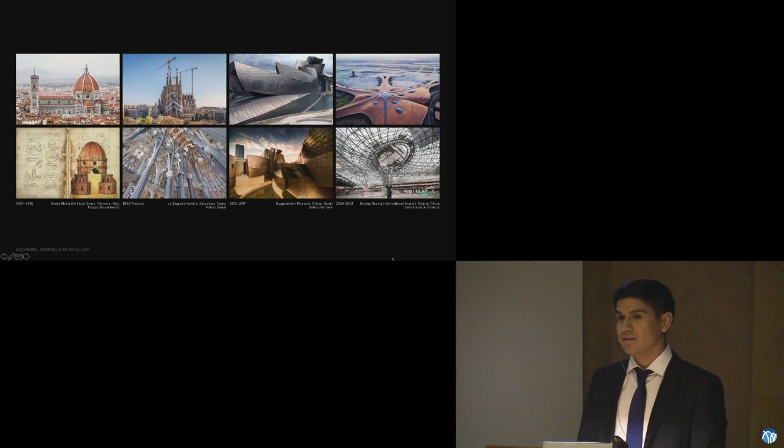And so moving forward, we think about La Sagrada Familia, where some of the physical models being used to demonstrate that this could work were actually the characterization of the structure, the hanging chain models that Antoni Gaudi put together. And what you see there is a shift from representation in materials to actually letting the materials demonstrate what the architectural form and structure would be. And more recently, if we think about the Guggenheim in Bilbao, we see that, of course, there's a need to express some artistic manifestation, but there's also a new use of digital technologies to be able to achieve this kind of geometry. And it's Gehry who pioneered the use of CATIA software, used in the aerospace industry well before it was used in the building industry.

And today, in projects like the airport in Beijing by Zaha Hadid, we see that there's a really big advance in how technology is being used to represent ideas of structural qualities and form, but also to discretize both the enclosure and the structure as one. So what we see here is an evolution of digital technologies and modes of representation to affect architectural methodology.

At SOM, we work on all kinds of projects, everything from small scale, including additive manufacturing projects, to large scale skyscrapers. And what you see here is every building looks different, and that's because every building has to function differently and has to respond to a very different environment. And so we calibrate our designs and inform them by looking at the environment, looking at urban systems, looking at material qualities, and also looking at the client's needs.

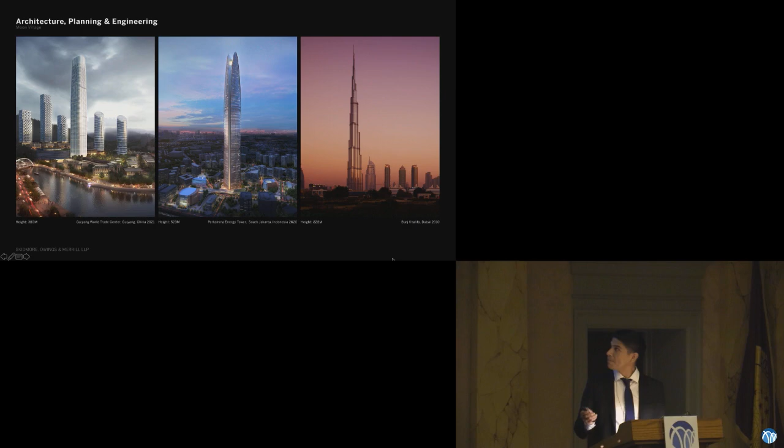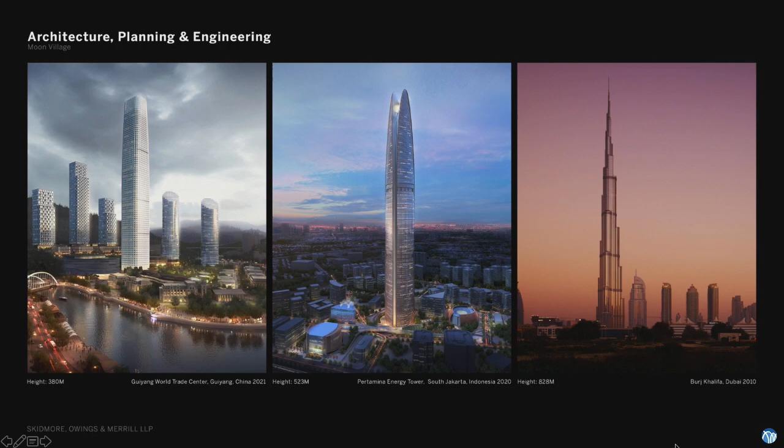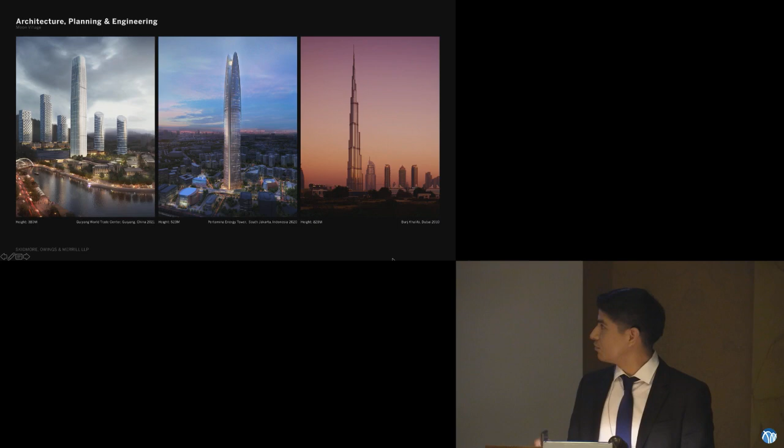But this small depiction of the projects you see here is only a small fraction of the work that SOM has done. And so we go from tall structures. Some of these buildings go up as high as 828 meters, like the Burj Khalifa. And some of these buildings have big ideas on how to use energy, like the Pertamina Tower. A project that I was very fortunate to work on, the Guiyang World Trade Center. This one takes urban integration to the next level, where we look at a tower not just in isolation, but we also look at the tower and how it integrates into a much larger urban system.

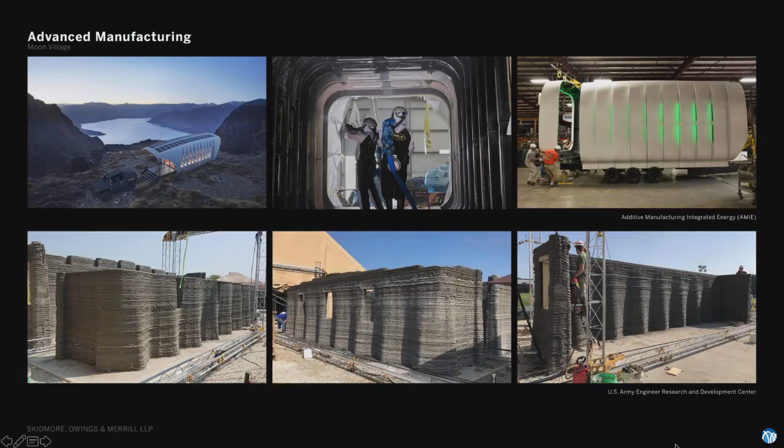And then we also have much smaller projects taking place at SOM. These are research projects where we're working in collaboration with institutions like the Department of Energy or the US Army Corps to look at new ways of manufacturing. In the top project, the AMIE project, they're using polymers to 3D print entire structures. Then on the bottom, we're using gantry systems together with additive manufacturing to look at how we can build using cement.

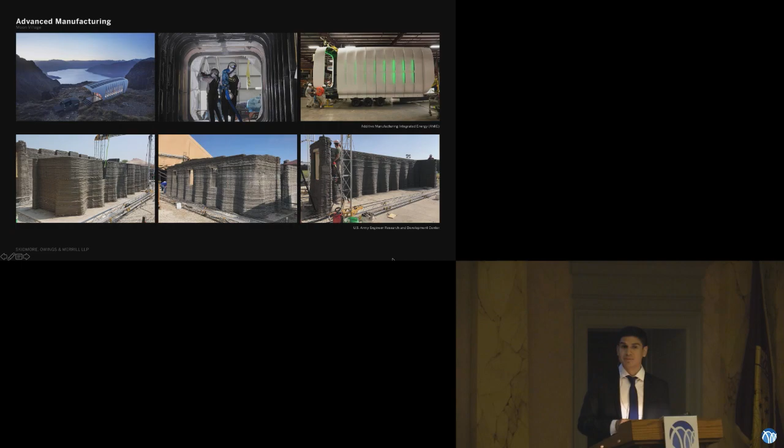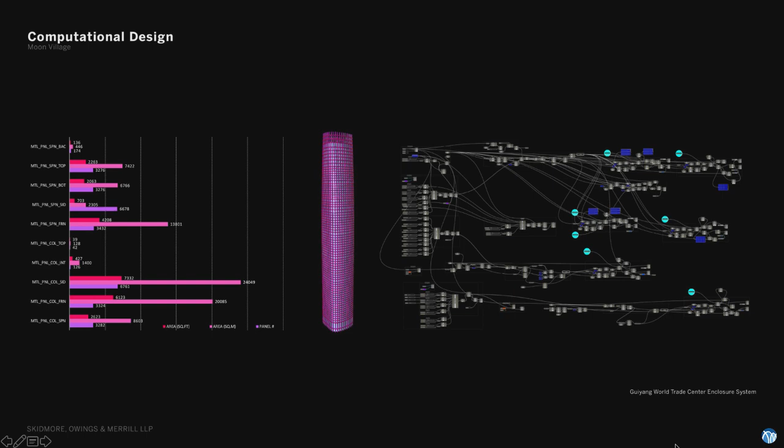And a lot of the things that we do for both small and large have to deal directly with digital technologies. What you see here is a representation of a digital model on the left, the quantitative data right next to it, and then also the scripting techniques that we use to build these very densely populated models. And all this allows us to think about architecture as form, but also architecture as engineering.

So now I want to move on to talking about this research with the moon base. Like I said before, it's truly an interdisciplinary project. And what I want to instill is that these kinds of ideas can only take place through direct collaboration. But because ESA is really far from us, obviously, we do have a methodology for how we do the research. And so it's treated more like a project and less like a research project. And so the goal is to take all of the knowledge and the expertise that we have built to construct cities around the world and to pass that on from an architectural perspective towards building outside of Earth.

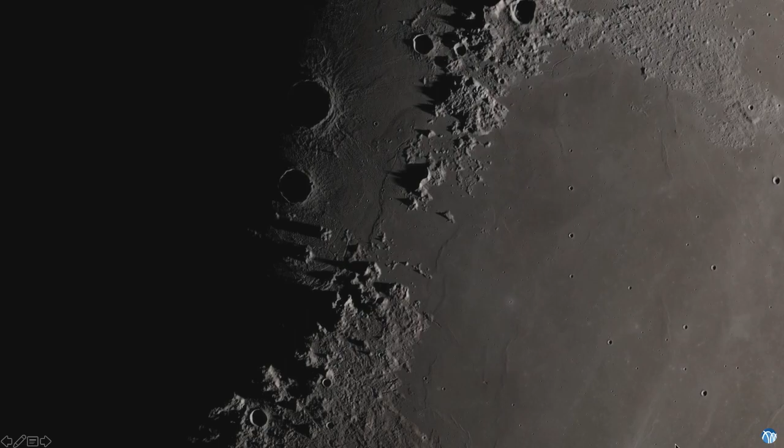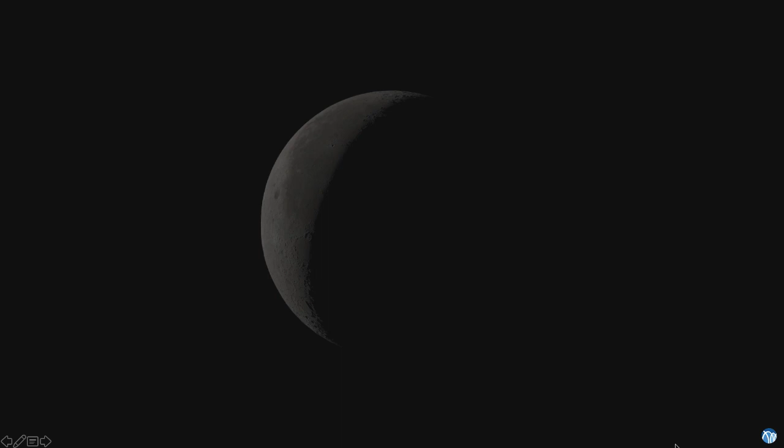We choose to go to the moon in this decade and do the other things, not because they are easy, but because they are hard. Because that goal will serve to organize and measure the best of our energies and skills. Because that challenge is one that we're willing to accept, one we are unwilling to postpone. That's one small step for man, one giant leap for mankind. Three,

So to start off, I want to first demonstrate the vision. The architecture and vision of a long-term human settlement on the moon requires a holistic approach to planning, emplacing, constructing, and expanding an evolving lunar ecosystem. An open architecture will depend on the efforts supported by multiple nations and partners, combining their expertise and capabilities toward the common goal of expanding human presence in space for both exploration and development. The vision begins with a singular architecture, which is designed to enable surface exploration and resource utilization operations, leading to a diversity of activities that will evolve and transform an architectural paradigm for living in the lunar environment. And what you see here is that vision.

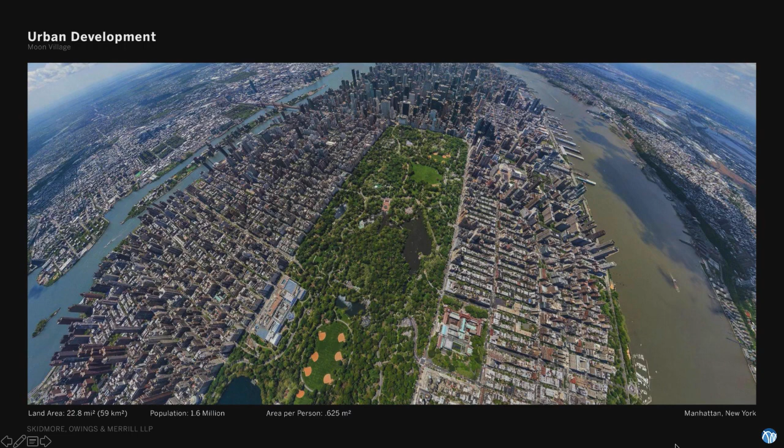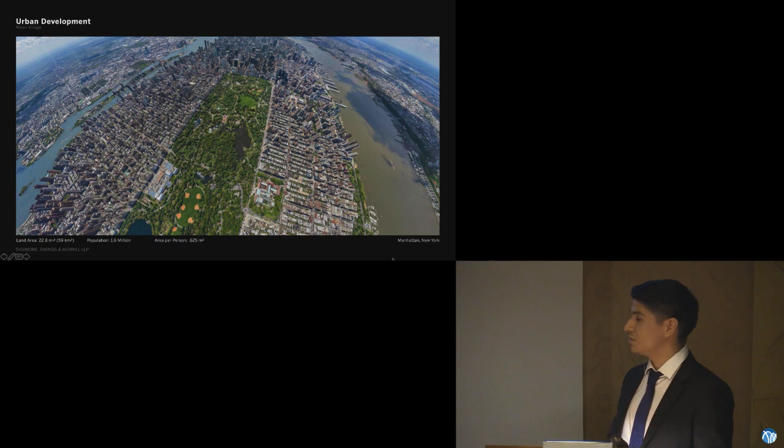But also, we have to think about urban development at large scales, because once we see the promise of how to exploit or how to develop the lunar surface and its environment, we're going to see that there's going to be a lot of interest and a lot of expansion. And so planning strategically, thinking about the far future, will have an impact on that. And we can see that places like New York, Manhattan, where you have huge, very dense populations, but also because of the geographic limitations, the only way to build is to build up.

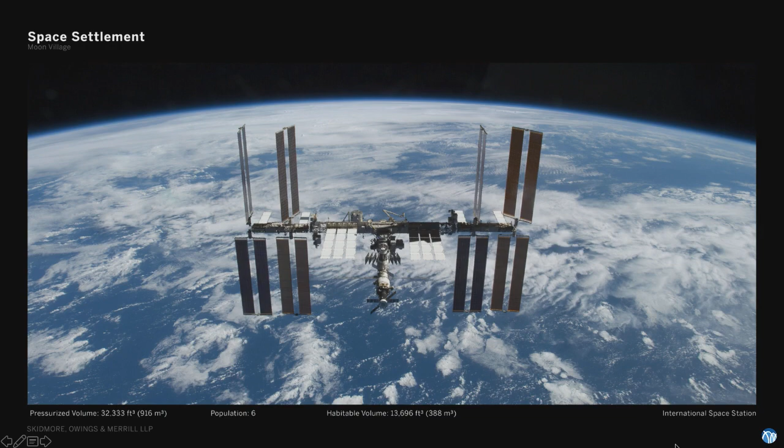And then thinking about space settlement, we already have a permanent space settlement, which is the ISS, which has been continuously operated since 2000. So we already understand what it means to live in space. With a small population, of course, never bigger than 6, but also a very small habitable area or volume in this scenario, because now we're thinking about volume and less about floor area. And so if you think about the difference between pressurized versus habitable, this is a big distinct factor where you want to really design around habitable volume, since that's the only thing that you're going to be using. In this case, we have 388 cubic meters of volume.

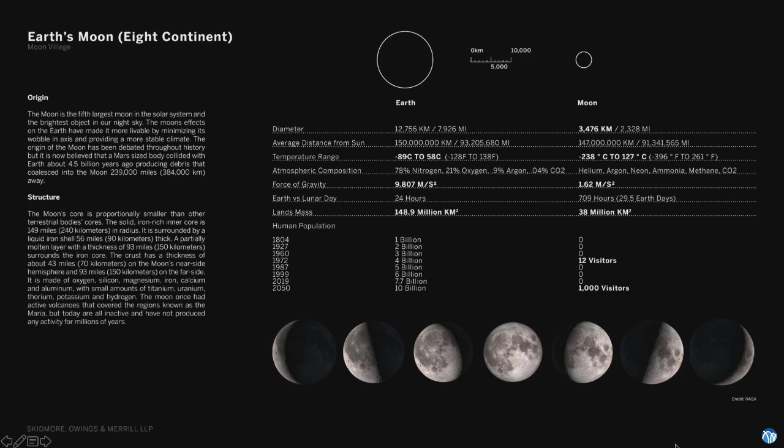And now, to think about the moon as a site, we see that there's a lot to contend with. The moon comes with extreme environments, but it also has a lot of opportunity. It's considered the 8th continent, roughly the size of Africa. And because of that, there's a lot of interest, but also because of its available resources. And what we've done is we've started to study the moon together with our partners at ESA, and to look at what are the key necessary criteria for evaluating a site for optimal development.

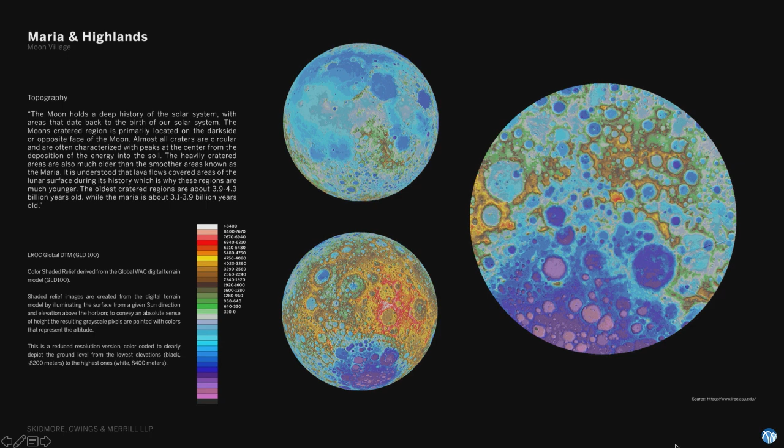And one of those things is the terrain. So we have 2 distinct types of terrain. We have the Maria, then we have the highlands. And we know that in the South and the North Pole, we have primarily highlands. But the highlands also offer an opportunity to capture sunlight because of the altitude. And because of the obliquity of the moon, which is something like 1.5 degrees, there's areas where you have near continuous sunlight, which allows us to think about energy collection.

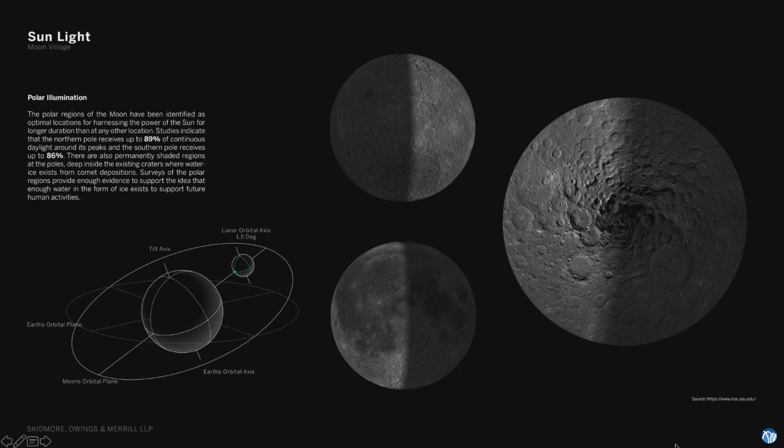And that's something that we've been targeting very closely because in some areas you have as much as 86% of near continuous daylight. And that means that by lifting your structures just a little bit off the terrain, you can actually take advantage of that energy. But also, you can take advantage of direct-to-Earth communications so that you can teleoperate equipment and robotics on the moon.

And the most important one, which we see as a medium for energy, is water, but also as a medium for life support, for oxygen, to have breathable air. And we know that there's cold traps on the South Pole, and this hasn't been completely accurately quantified, but we know that there's a lot of it. And some of the mapping done from previous missions has demonstrated that. And so we've studied that together with ESA to help identify small water ice deposits, not large ones, because those would be really far to reach and hard to reach, but smaller water ice deposits.

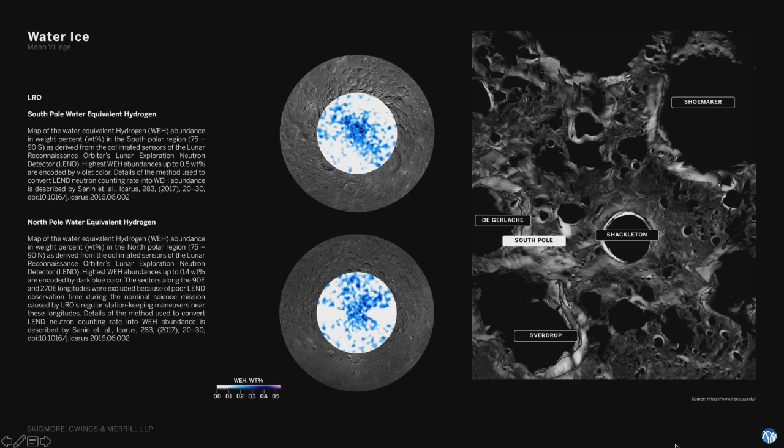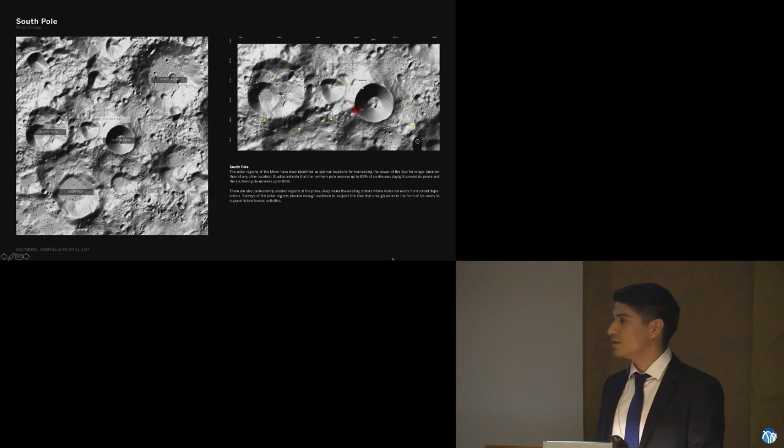And so we've targeted an area around Shackleton Crater on the west side, looking at the location and character with small water ice deposits, which you see here in red. And what's unique about this area is that it also meets the highest points on the moon, which again increase the amount of energy that you can collect, but also supply us with direct Earth line of sight.

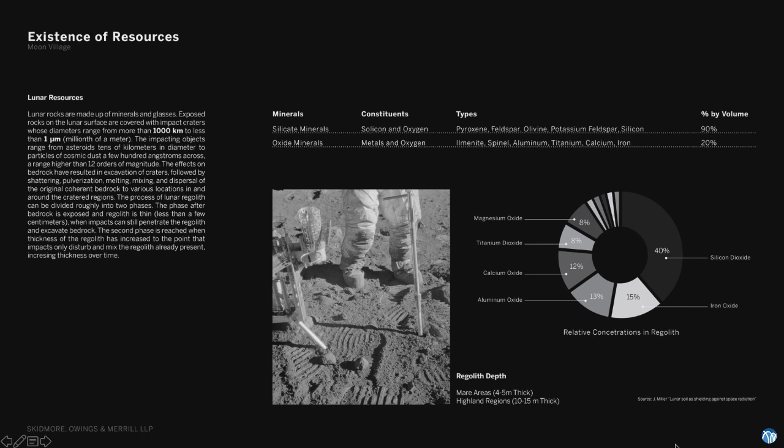And lastly, of course, we have lunar resources, which are inside the regolith. And so if you think about the opportunities that the regolith provide, being primarily silicate and oxide minerals, we can take the regolith, we can take the metals, we can produce tension structures, we can produce materials for life support, we can produce composite structures to help shield from radiation, but also we can learn how to operate and how to build on the moon.

And so in some areas, in the mare areas, research has indicated that the thickness of the regolith is 4 to 5 meters thick, where in the highland regions, it can reach as much as 10 to 15 meters thick. And so it's something that we have to study because if you're going to build a solid foundation, you're not going to hit bedrock. You're going to have to find ways to sinter the regolith to build a solid foundation.

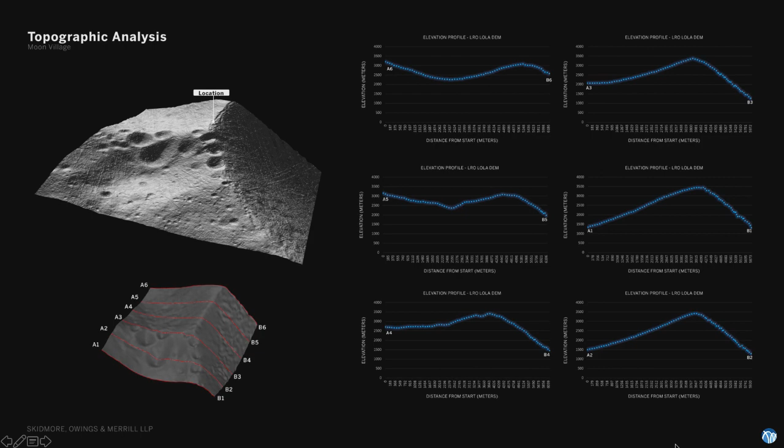And the way that we've done this is by taking information from the LRO mission and creating topographic models, three-dimensional models that we then slice up and we start to evaluate for levelness. So the less change in topography, the better, because we know that we have certain landing capabilities that can land with a certain precision. And if you can identify an area on that part of the moon where you can land equipment, but you can also ensure that there's enough mobility, then you have a good site. And so we've done this for various different sites, and that's how we came up with that site.

So the next thing is also fuel, something that we understand is really a big constraint, because in order to get out of the deep gravity well of the Earth, you have to reach a certain delta V, which is 6.1 kilometers per second. And so that constitutes a lot of the vehicle mass that you have to consider. And we understand that this is not something that we're going to completely work through, since we're not in the business of transportation systems, but it's something that we build into our design thinking so that we understand the mass penalty that our structures have to incorporate.

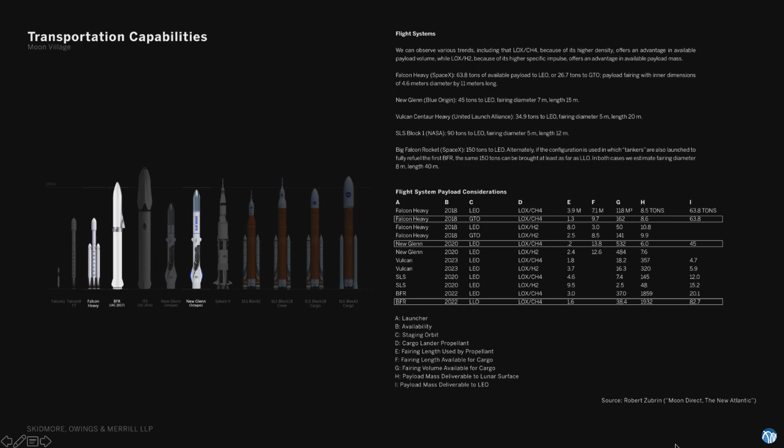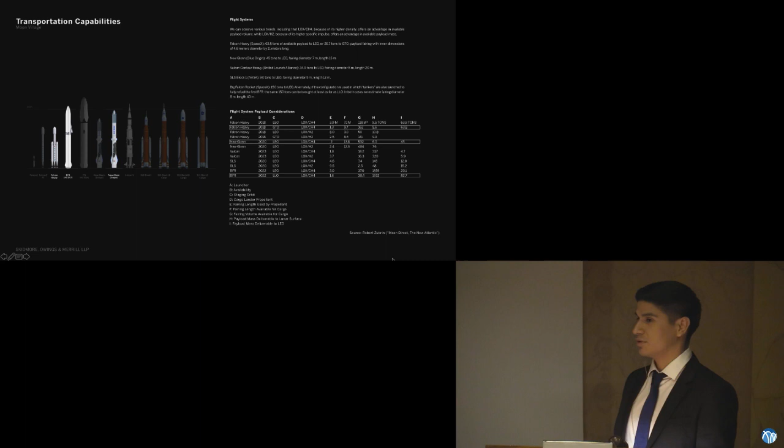And some of the vehicles that we've been looking at more recently include the Falcon Heavy, which is what we see as a low-volume, high-mass vehicle. And then we also looked at the New Glenn, which is more of a high-volume, low-mass vehicle. And then hopefully, when the BFR comes online, we can start to think about larger architectural types. And if you look at the numbers, for example, the Falcon Heavy can take 63 tons to LEO, where the New Glenn can take 45 tons. And of course, the BFR could take a lot more. And what we've done is we've tried to optimize our mass in our structures and our designs to meet the payloads for any one of these vehicles.

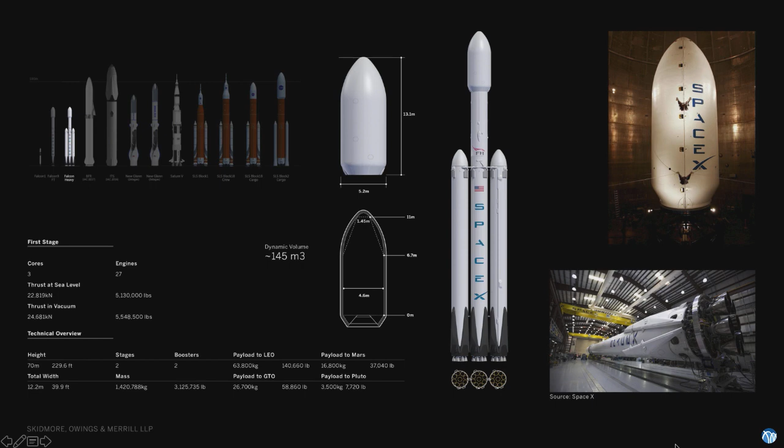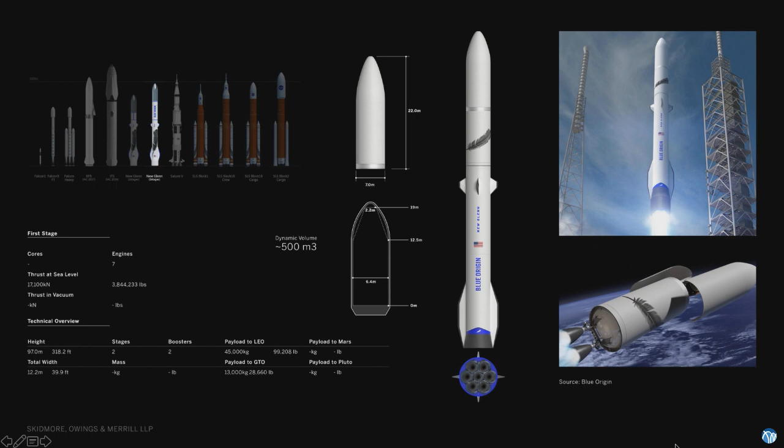Here's a depiction of what the fairing looks like. So when we're designing, we're actually thinking about the volumetric constraints of the fairing for the SpaceX vehicle. In this case, we have about 145 cubic meters of dynamic volume, where in the case of the Blue Origin vehicle, we have roughly 500 cubic meters of dynamic volume. And one of the things that we've tried to incorporate is also the fact that the fairings also taper. And because they taper, our designs are also trying to maximize the volume, and so we start to think about how we can fit structures that taper into that form.

And we looked at various classes of structures. So we understand that there's a class 1 structure, something similar to what you see on the ISS, where you have everything pre-integrated. It's a rigid shell structure. There's also modular systems that you can put together or assemble in space. And then you have future structures, which are more in situ. And those are the ones that we'll touch on briefly at the end.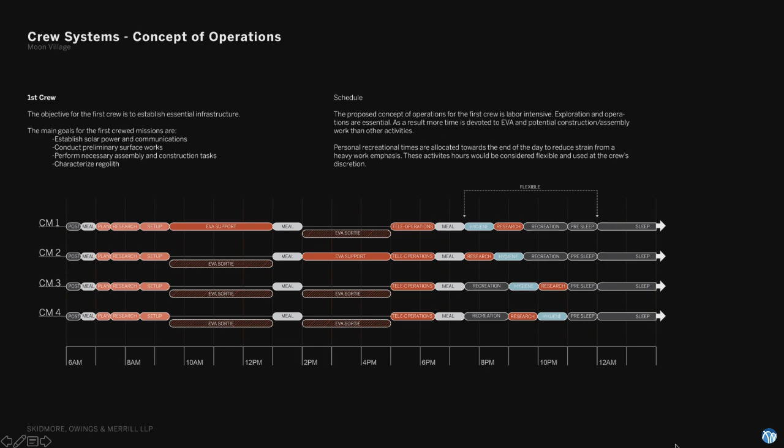And to go back into how we design these systems, first we think about the kinds of operations that would take place. It's like designing a house. You have to think about the activities that would take place, like how much space do you need for berthing, how much space do you need for EVAs, how much space do you need for working, for all the kinds of activities that we imagine would take place.

And in the first scenario, for the first crew, we understand that there's going to be a lot of heavy work, which means the emplacement of a first habitat also means the preparation work that needs to take place in order to bring additional missions and additional astronauts. So in this case, we prefer a lot of EVA space, and this is more or less a schedule of how we imagine the day of an astronaut's life taking place.

And for a second crew, we started to appropriate more research time, more research space, to think about the kinds of operations that they would be doing, like science experiments or operating vehicles from a distance. But also looking at the dimensional constraints, because dimensional constraints on the ISS or on Earth are very different from what they would be on the Moon.

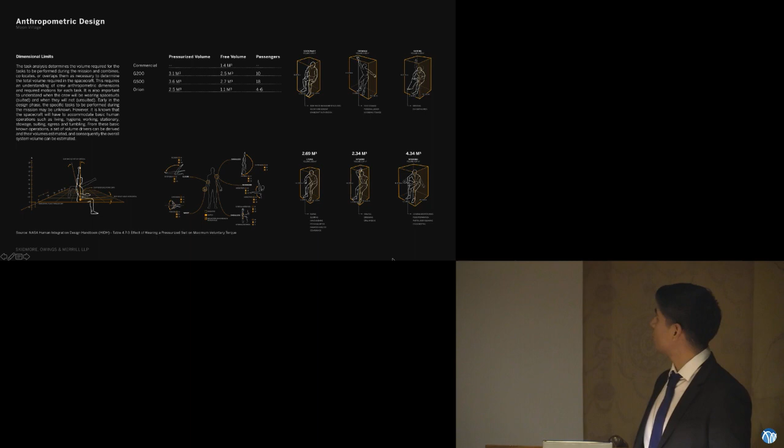In this case, you're looking at diagrams which would be for the ISS, for deep space. And we can only study these to a certain extent because we need to start to come up with our own dimensional constraints. And here you see that for space applications, living, the human body occupies something like 2.6 cubic meters of space. For hygiene, it's about 2.3 cubic meters of space. And for working, it's about 4.3 cubic meters of space.

And so when you compare that to other spacecraft, like the G200, which is an airline spacecraft, you're looking at a pressurized volume of 3.1 cubic meters or a free volume of about 2.5 cubic meters. And if you look at the Orion spacecraft, you have a pressurized volume of about 2.5, but for every individual, you have 1.1. That's really constraining. So you wouldn't use that kind of criteria for volume for a habitat on the Moon.

The other considerations that we took a look at were also the way that you configure the spaces, the kinds of interfaces that you would develop in place inside, the kinds of translation techniques. So ladders, stairs, also the restraints for mobility, and also windows, a very important part of the design, and lighting, of course, for maintaining circadian rhythms.

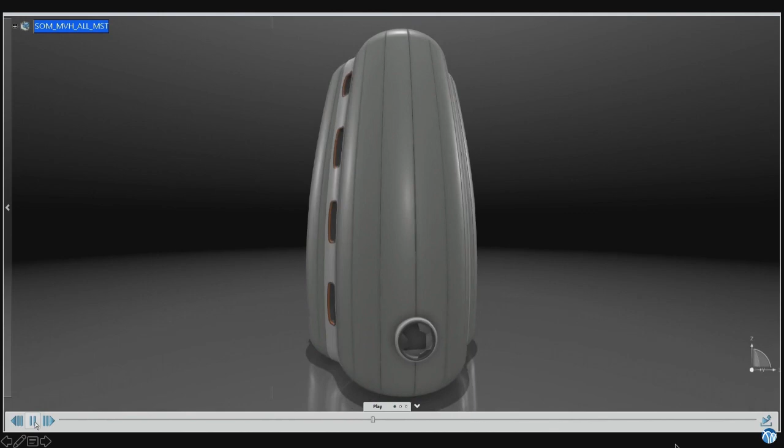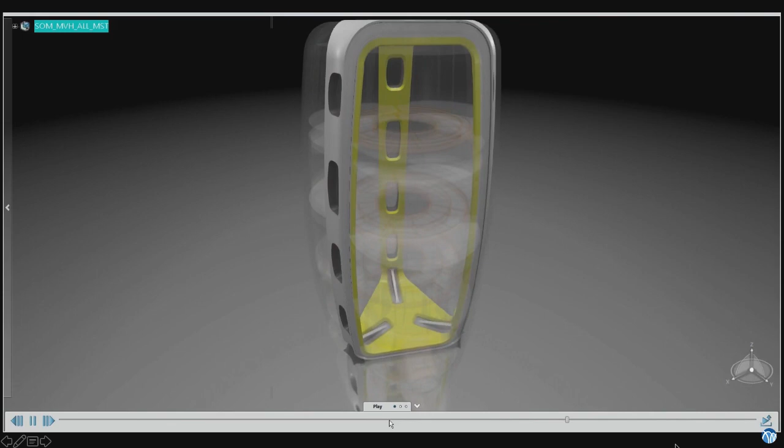And so the way that we develop these models, because they have to be parametrically driven, otherwise what you end up with is a design model that gets criticized, and then there's something not working well, so you have to take it apart and start all over again. In this case, we're using PLM platforms, where you can look at the life cycle of a model, you can look at the engineering, the mechanical systems, the structural systems, and we divide each one into its own discipline so that we can work on each system in isolation, get information from the team, from the engineers, from our consultants at ESA, and then integrate that knowledge and information back into the model.

And what you see here is ghosting of the floor system. This is in the schematic stage, a ghosting of the shell system, which we'll talk a little bit more about in a little bit.

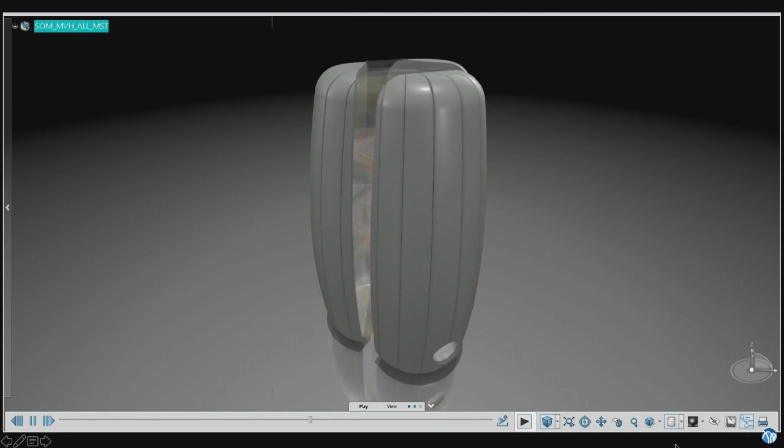And so altogether, our system produces close to 400 cubic meters of occupiable space. That's after inflation, of course. And by optimizing the structure, optimizing the amount of mass that you carry with you, you wouldn't carry all the wet mass, like the water for shielding or for life support. All that gets placed into a separate shipment so that we can then optimize for only the mass required to maintain the structure. And that gives us something like a 47 metric ton mass habitat.

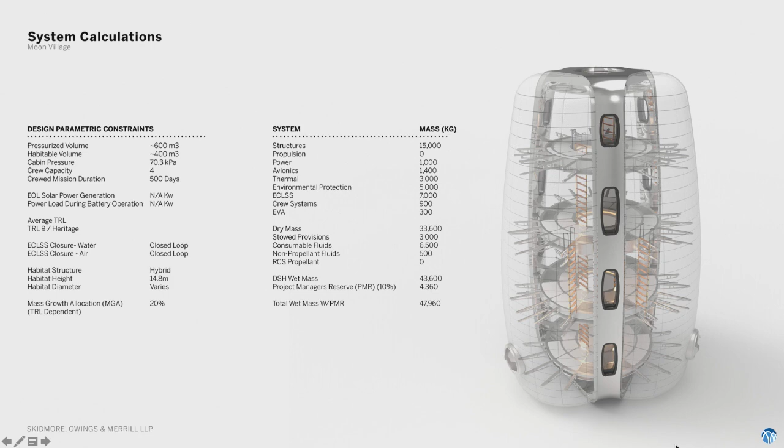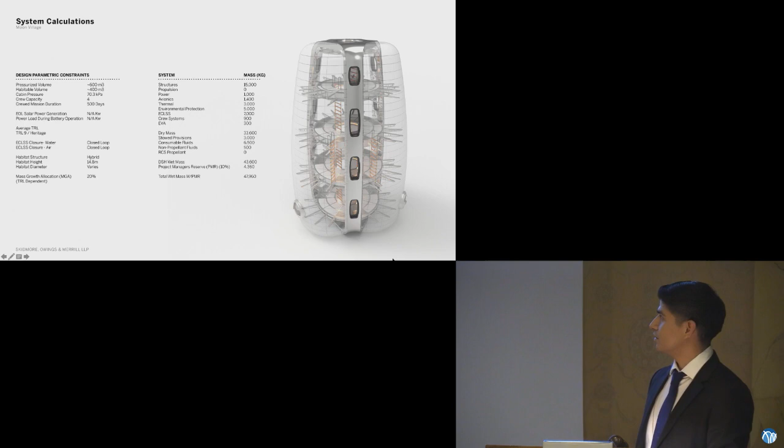And as you saw from the transportation capabilities, we can fit that within at least one or two of the vehicles that we looked at. Of course, dimensionally, we can play with that. We can play with the overall diameter, with the height. That's something that we've started to look at with different mission scenarios, depending also on the requirements that ESA has been giving us.

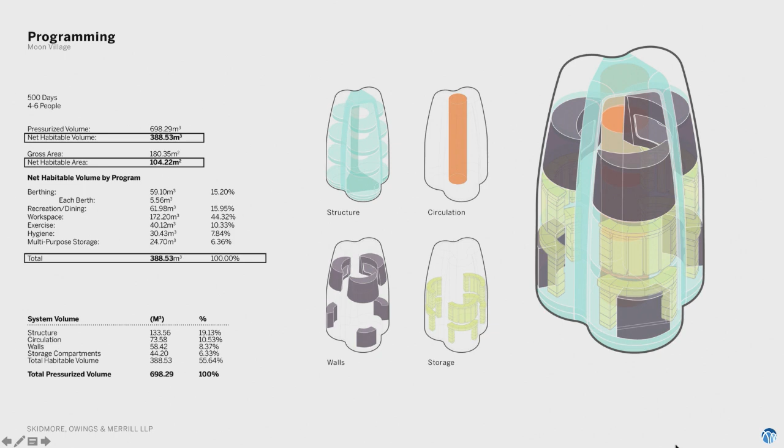And so what we started with was we placed most of the EVA systems at the ground level, of course, because you want to interface with airlocks, with EVA tunnels, and also with vehicles at the ground floor. And then on the second floor, we placed all the working spaces. So directly coming out of an EVA, you can go into a workspace. Living spaces are on the third floor. And then on the fourth floor, we placed hydroponic systems for food growth, but also for biophilic effects and research.

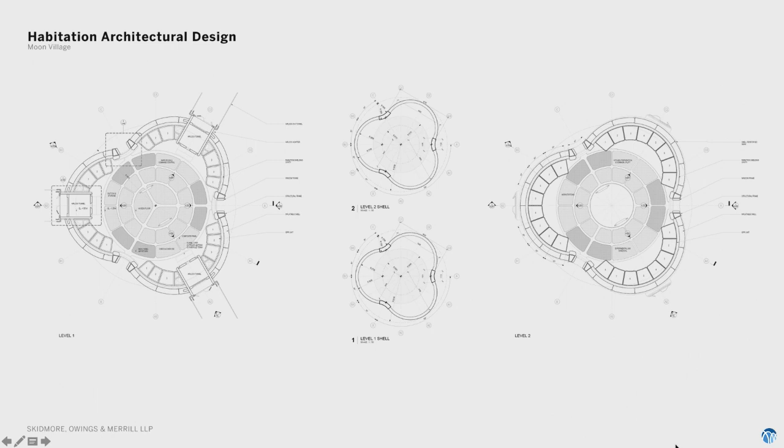These drawings look better on paper, but just to give you a quick overview. So on the left, you see the ground floor, and you can see that we're looking at how the airlock adapters connect to the tunnels, and then how the rack systems to support different EVA activities would be placed along the structure. And a big part of that is also defining the geometry. And so we look very closely at dimensional constraints for creating the geometry, the form. And then on the right, you see the second floor with all the rack systems displaced.

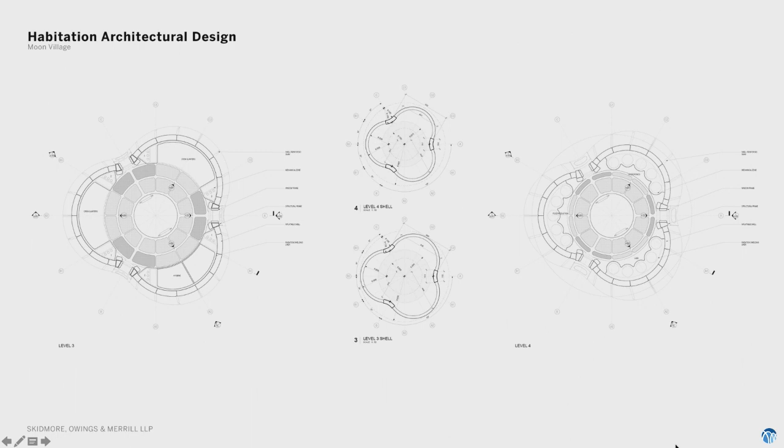And on the left here, you have the third floor, which is the crew quarters. And we imagine that the crew quarters would also have additional shielding. And so in the pocket of these crew systems, you would have about 100 to 200 millimeters of volume for water. So you can jacket the sleeping quarters with additional radiation protection. And then on the right, you see the top floor where we have the hydroponic systems.

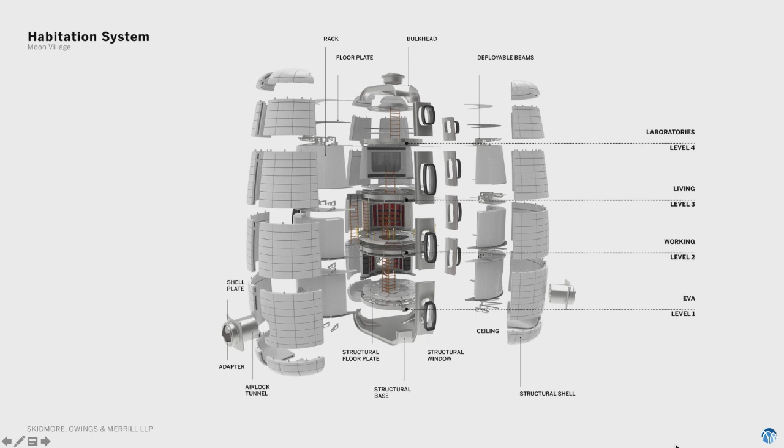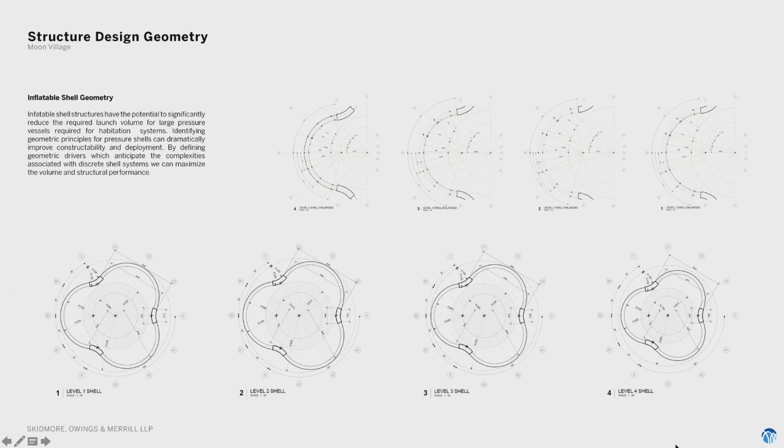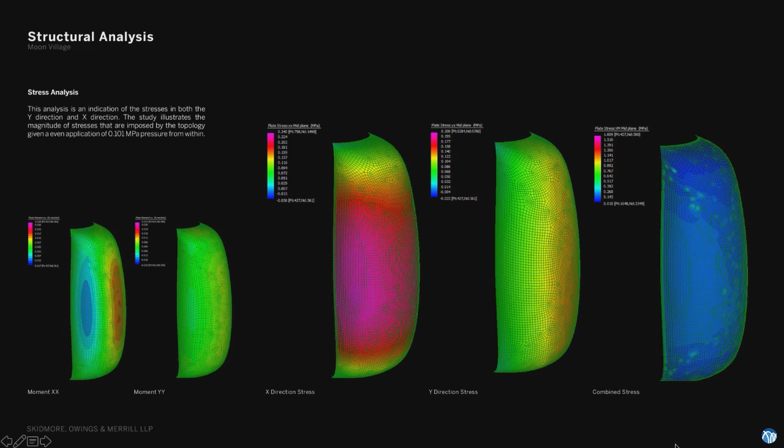So to talk about the shell a little bit more, our engineering group has been doing some finite element analysis, looking at directional stresses, both horizontal and vertical, or X and Y stresses. And what we've done is we've taken the edge condition as an attachment point, so that becomes the support link to the rigid shell, and then pressurizing it to 1 atmosphere, and looking at the variable conditions that the inflated state would have to undertake. And this has been really helpful in articulating the form and optimizing the shaping of it.

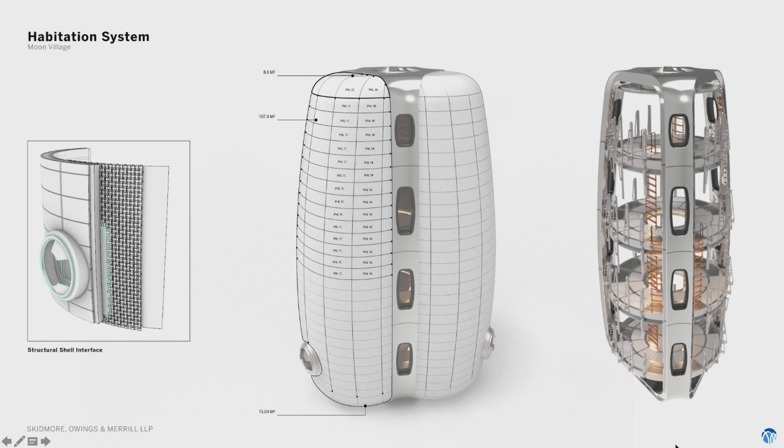So here's a depiction of the habitat, much closer. So you see on the left is an interface with the shell adapter. And the way that we've been studying this is by looking at weaving conditions. So we've studied various weaving techniques, looking at some of the patents that NASA has already been developing for integrating rigid shells. And of course, there's a mass penalty for integrating rigid structures into an inflatable shell. But the key here is looking at how to tie the Vectran strands, which is a material of choice in this case.

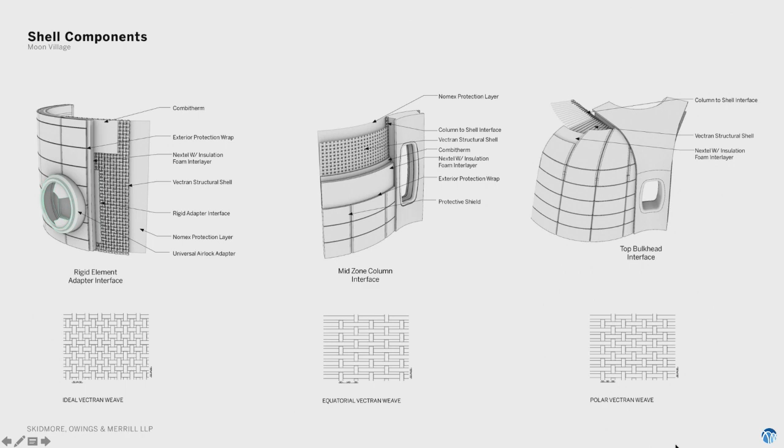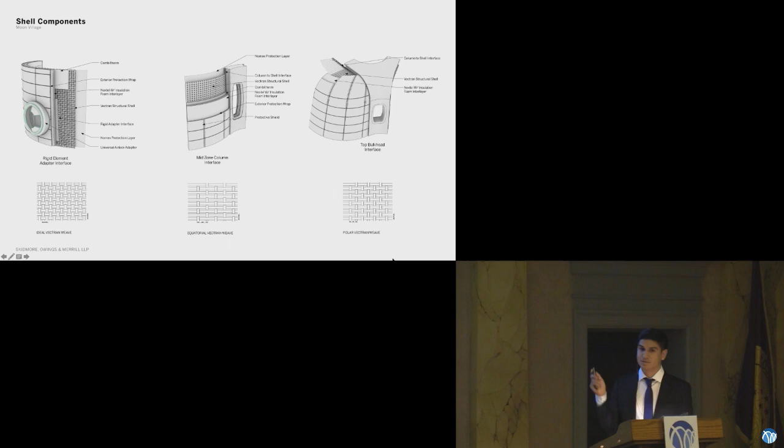And we've looked at not just the connections at the airlock, but also connections to the frame and connections to the top, the bulkhead. And what we've studied here is that there's different configurations which work best in different scenarios. And so the only way to achieve this is by applying almost like an edge condition. So there's a boundary condition where you go from being an equatorial Vectran weave, which is a term we coined, to being a polar Vectran weave, where the density of the weaving connections actually get closer and closer as they come towards the bulkhead. And because of that, we have to space the Vectran strands very differently.

And we've looked at also the kinds of Vectran types that we would use. So in this case, we're looking at a thickness of about 30 millimeters for the Vectran. Again, the drawings look better in paper, but here's a drawing of the different sections as you move up the column, just to have a better understanding of how we set the working points and how we're starting to define the structural interfaces with the floor system.

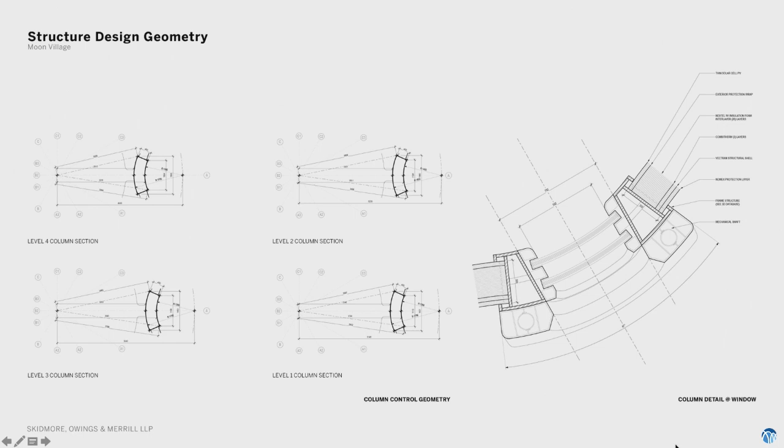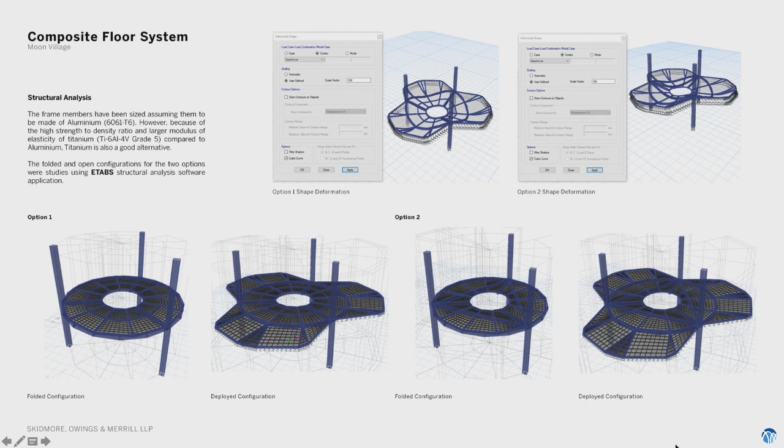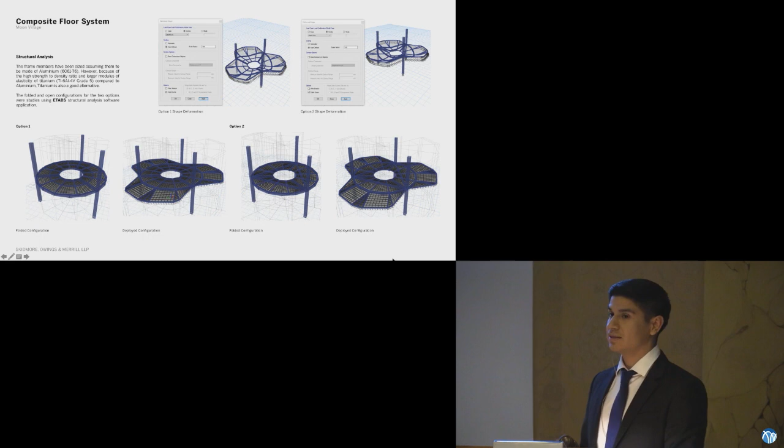And the floor system is also a unique challenge because you have to imagine that the floor system is deployed after the shell has been pressurized. And because of that, we need to optimize for mass and also for deployment. So we looked at one option where we have a folded configuration where concentric beams are actually making up the primary floor structure. But then we also looked at another one where we have a triangle which connects directly to the columns. But in the study, we realized that actually it's the concentric structure which gives us the most opportunity for housing various equipment inside of the floor system, because the floor thickness has an assembly of about 400 millimeters. So we can take advantage of that. But the beams themselves are not that thick.

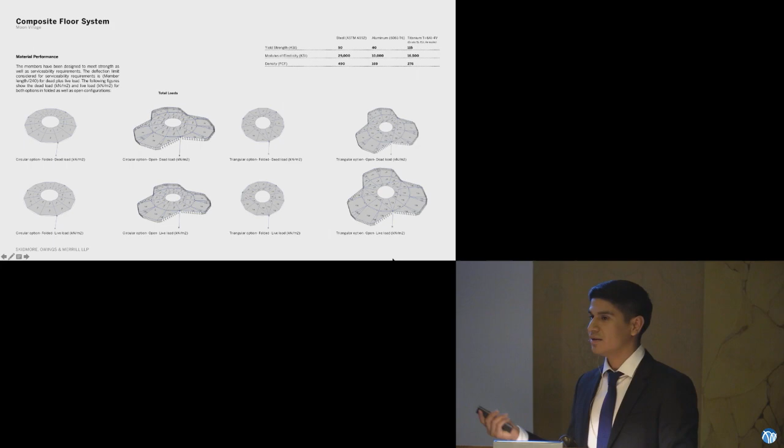I should clarify that. So we're using software called ETABS here to look at how to size the different members appropriately. And also looking at different materials. We've looked at steel, structural steel. We've looked at titanium. And we also looked at aluminum. Somebody said to me earlier that the cost sometimes outweighs the benefit. So titanium is something that, of course, has a much higher strength, but also the cost would have to be thought about if we were to use it. So aluminum seems to be the choice of material in this case.

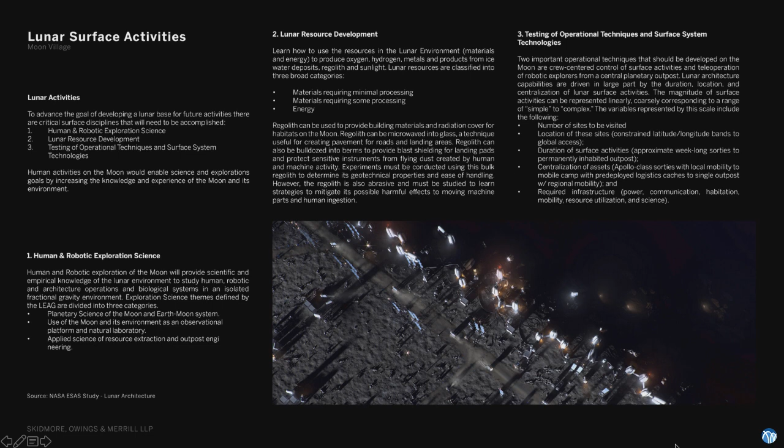So moving forward, we want to talk about master planning, thinking about large-scale development, because after all, one habitat won't do it for all of us. The lunar activities that would need to take place and the kinds of systems that we need to consider would include human and robotic exploration science, of course. We need to make sure that we analyze the site, we characterize the materials, and that we identify where we're going. And then, of course, lunar resource development. We want to make sure that there is enough proof that we can actually process the material, we can make use of it, we can extract the water, that we can build. And then finally, the testing and deployment of surface systems like habitats, mobile equipment, and power stations. So this is all just a list of things that we've been planning for in our master planning thinking.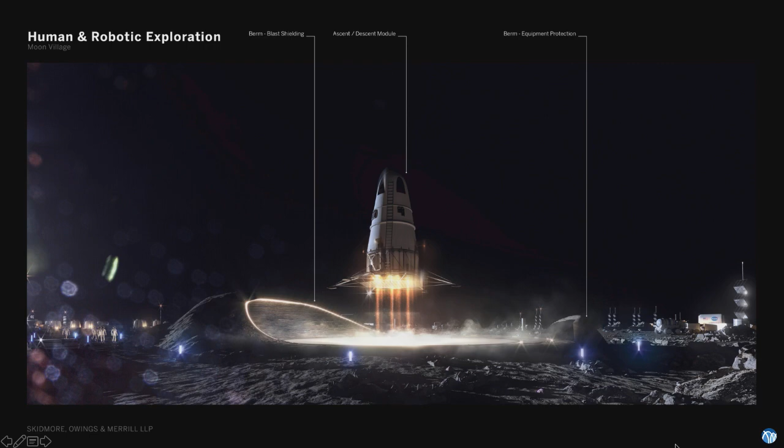And of course, when you think about the kinds of infrastructure, you would also build things for landing equipment like berms, because you want to shield your settlement from any projectiles from the plume. And so once we have additive manufacturing or in situ construction capabilities in place, then we can learn how to build berms and landing pads and roads so that we can mitigate the amount of dust that's being pushed around, because the dust has harmful effects on both equipment but also on humans.

And to add additional shielding, we're also thinking about using additive manufacturing to shield our habitats. Limited shielding, of course, because you don't want to cover the entire habitat in regolith, but also this would be an early study of how to work with large-scale shell structures that could be built in place, in situ.

So when you think about the first mission, we worked together with ESA to think about how we would actually get the first habitat there. And the consensus is that the first launch, we would first deliver a lot of cargo. We would deliver mobility systems, and also maybe some proof of concept for ISRU, just so that we understand what's possible. In the second launch, we would start to send much bigger equipment, like the actual lander that would be capable of landing the habitat, and also a system that could actually take the habitat from the lander and place it on the ground.

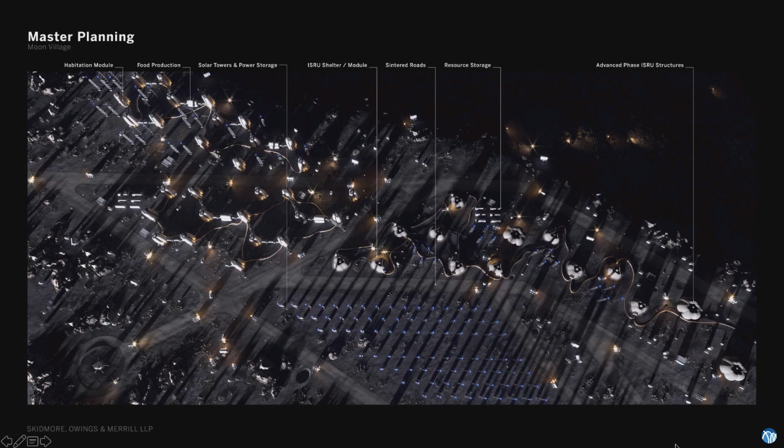And then once we have these ready-made structures in place and we have a strong ecosystem and enough workforce, we can think about building ISRU structures like what you see on the right, a much more advanced version of what we imagine to be architecture. And of course, that needs a lot of power. And so you see that the power field on the bottom needs to go hand in hand with the settlement.

So first, ready-made habitats, of course, landing pads, expansion of the first settlement, additional roads to connect you to deep water ice deposits so that you can do some ISRU testing and development, and then power capabilities to increase the amount of energy that you can collect, and finally, advanced ISRU structures. All connected together by a network of roads.

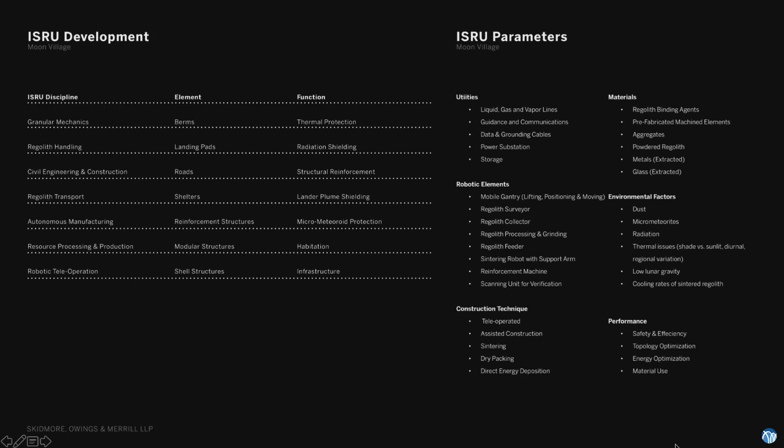And of course, we didn't mention all the ISRU infrastructure that you would need, but in addition to some of the things that I mentioned, you can also think about granular mechanics as being a discipline that could be evolved on the lunar surface, civil engineering and construction, resource processing and production, of course. And these are different trades and disciplines that would be evolved only if we can get an ecosystem on the moon.

And of course, a lot of people here would love to do science on the moon, I'm sure. And so that means that new modes of science could be conducted once we have a settlement on the moon. And the elements that would allow us to do that would be roads, landing pads, berms, habitats, and of course, shelters, since radiation is one of the biggest challenges to deal with. And so having ISRU capabilities means that you could shield yourself from galactic cosmic rays and solar particle events.

And so we've looked at regolith based on literature review. We understand that regolith has a certain composition that has benefits. Of course, we know the cons, but compared to Portland cement, it's actually 5 times stronger in compression. And couple that together with 1/6 G, and your imagination starts to think about what's possible, what you can build with that.

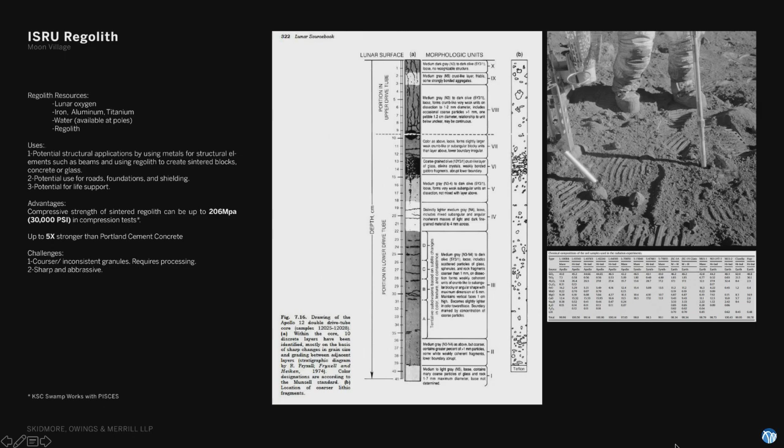And so we studied that, and we took a look at using some of the digital technologies that we use for building structures and engineering to come up with concepts that really push the boundaries of what ISRU structures could be. But of course, you have to visit some precedent.

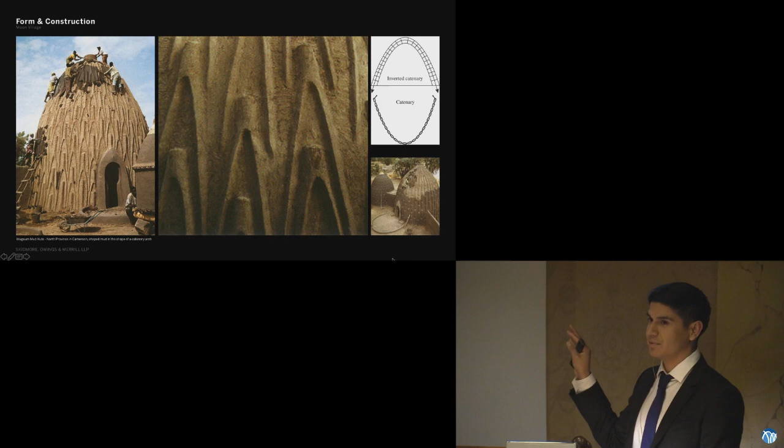And precedents like mud huts, for example, in Cameroon, these are really great precedents because they work in 2 ways. One is they use a very simple geometry, catenary curves, to create tall structures that are supported primarily by their geometry, not so much by their material mass. And then also looking at the articulation on the outside, you see that relief, which is actually a way to optimize the structure. So there's something that we can learn from natively built structures, and we want to make sure that we look at all forms of architecture, not just the most advanced stuff.

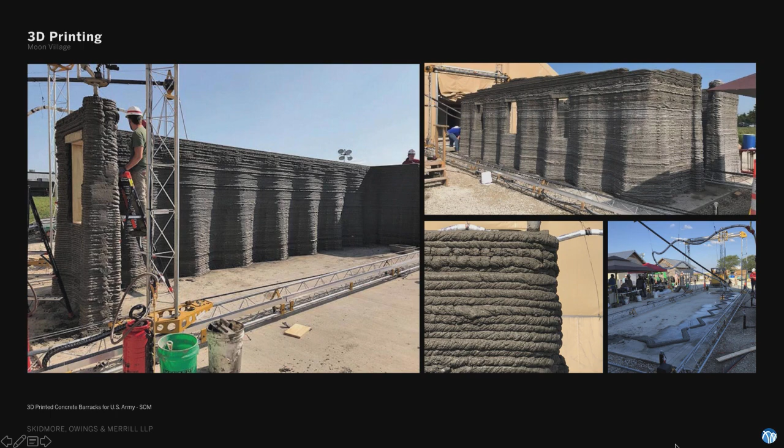And I think one of the biggest challenges is not the speed of printing, but actually the equipment. The equipment tends to fail quite often. And so there's a lot to learn with that. And if you think about the abrasiveness of regolith, you're going to have to build robust equipment that can actually do the work. So a lot of people actually have to go and fix the equipment to make sure that it works.

And so here's a concept that we put together, just one of many, but this concept takes some of those keynotes that we looked at from that case study, where we're looking at both the form, but we're also looking at the textural quality of the shell. And that allows us to optimize for mass, but also for the thickness required to do radiation shielding.

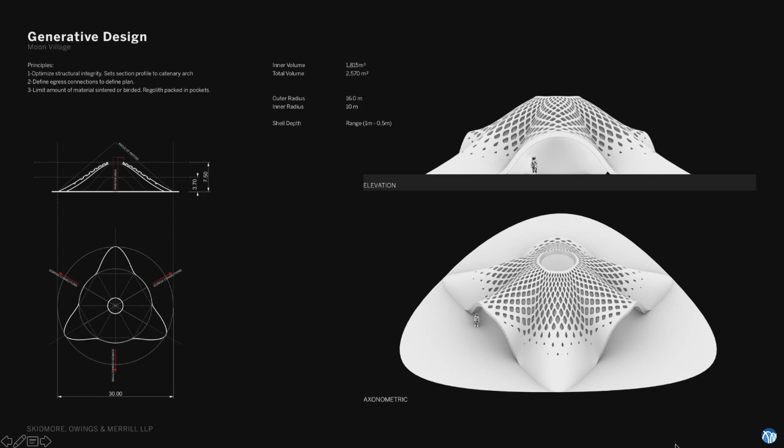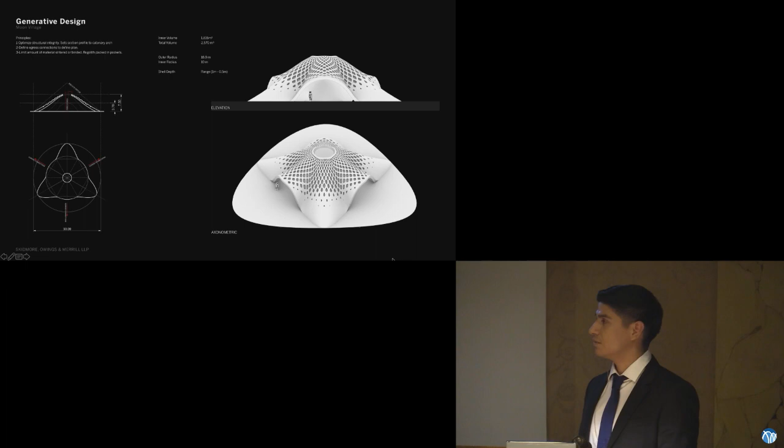And of course it's open, because this is not a habitable unit. You wouldn't go in here and pressurize it. You would only use this to protect your equipment, so you can do servicing of vehicles, servicing of experiments, and this would actually extend the lifespan of any astronaut, because then you can provide the shielding required during their career. And so we used some finite element analysis to look at the form and the distribution of loads, and that's how we optimize the structure.

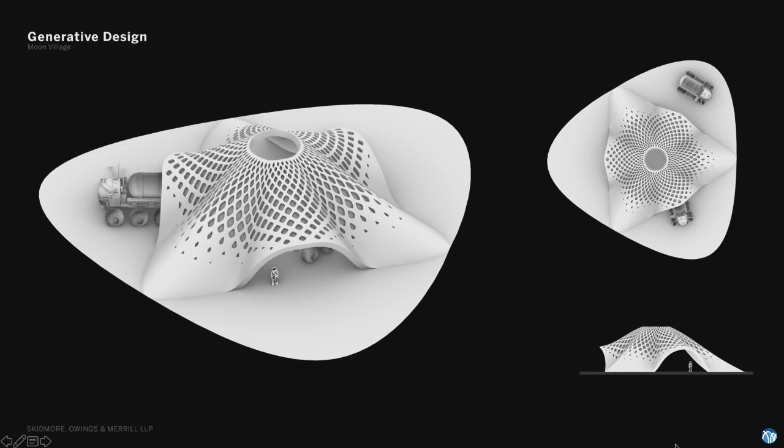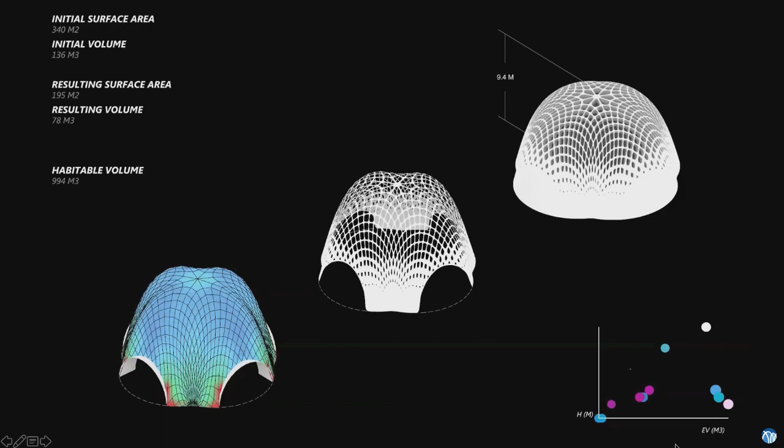And then here, what you see is a multi-objective optimization technique that we use, where we set the criteria. In this case, the criteria is structural performance, but also mass and volume. So you want to increase the occupiable volume, you want to decrease the mass, and you want to increase the structural performance or reduce the forces.

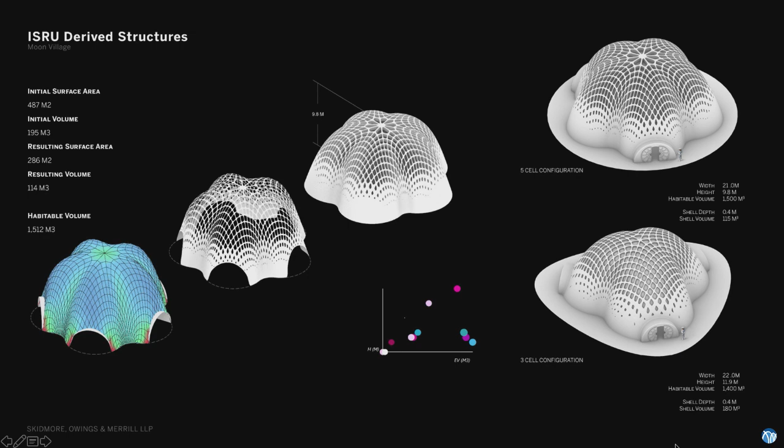If I was to tell you what the next steps were, the next steps are, we're going to definitely try to test some of these ideas and to start to think about prototyping.